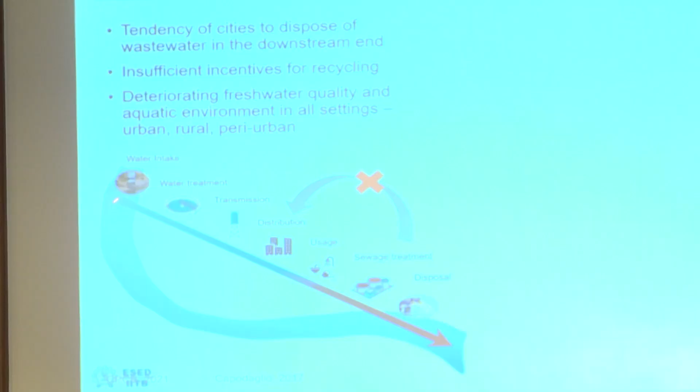So what is the status of sewerage in India? If you see, we are stuck in a linear model of water use, okay? Because earlier our primary aim was to supply water for the businesses and cities. So historically we built dams and reservoirs, we lift water from lakes, we transmit it through big lines, we distribute and use it, and then the used, contaminated water, treated, untreated or partially treated, is mixed with our lakes, rivers and water bodies. And that is the linear model of development that has been followed.

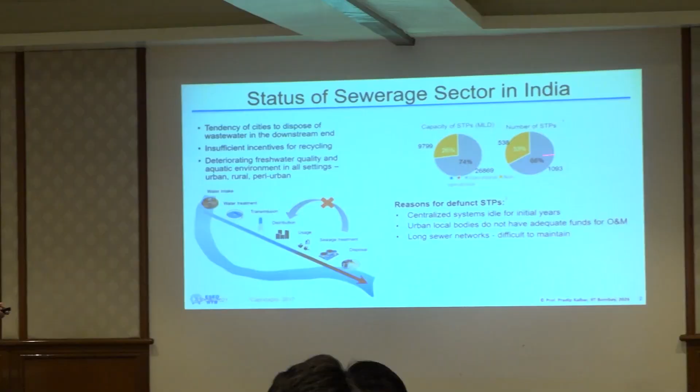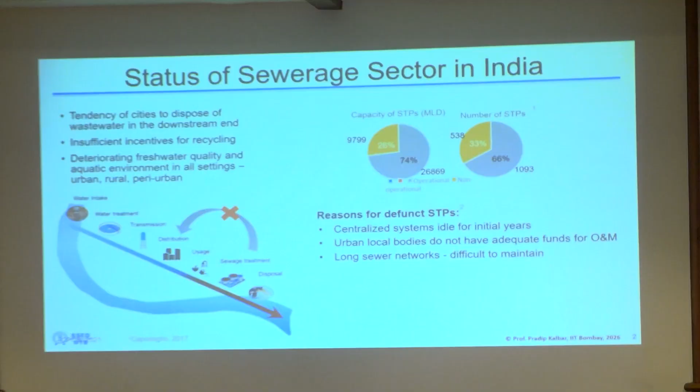Now STPs are basically proposed to fix this problem, that we'll have an STP here and it will solve it. But an STP will not work on its own unless you put energy, manpower and effort into it. And to put in that effort, you need money. So unless that money is sustained, nothing will be there. So STPs are there, but they may not be operational. Many STPs are defunct wherever you go, because the economics has not been worked out for those STPs. So we have to work out the economics.

There are highly centralized sewage treatment plants which I have seen remain idle. I will show some photographs. These are just white elephants, sitting there doing nothing. See, the infrastructure is funded by some third party, right? Central government funds and development banks fund the infrastructure, and urban local bodies are meant to maintain it by generating revenue, but there is no strong revenue stream for sewerage or sewage management, okay? The revenue is not protected, not segregated for sewage management.

So there are issues that I will further explain. The point is that merely creating infrastructure is not sufficient, okay? We may think that infrastructure may solve the problem, but it may not. The infrastructure is there, but whether it is sustained, whether it is working or not, that is very important.

So what is happening is we are always jumping on some very high-end solution, that we'll have underground drainage, then the problem will be solved. But if you see, a large part of our cities are unorganized. Informal settlements are there. There are many communities who do not have access to water supply.

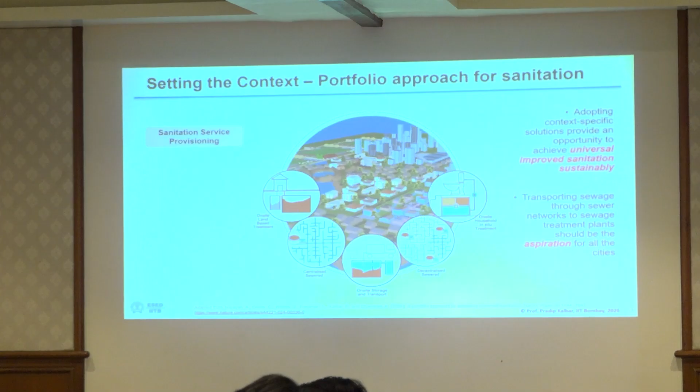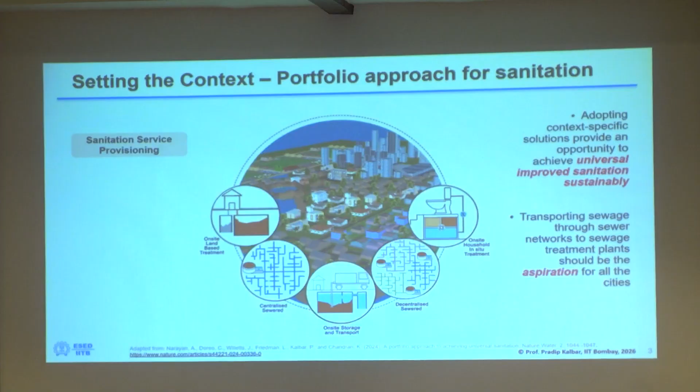So for that, we need to have something called a portfolio approach. Portfolio means we have to have a bouquet of options given to communities to solve the sanitation problem. If you just focus on only an underground drainage network, only one large-scale STP, that will not work for our future. So we have to move from this centralized sewer; other options are also there, which are not discussed, not prioritized. Like on-site treatment, decentralized sewage treatment, on-site storage and transport. So many other things are coming.

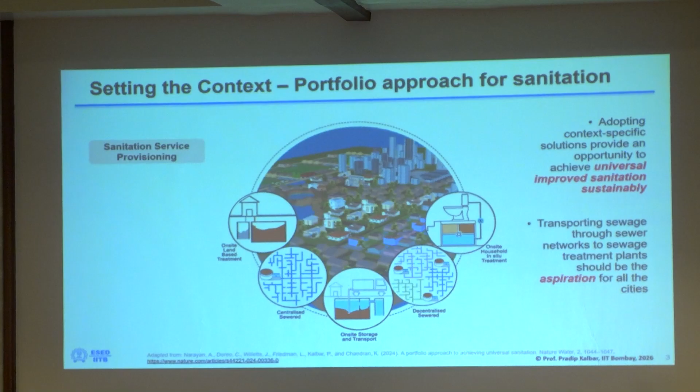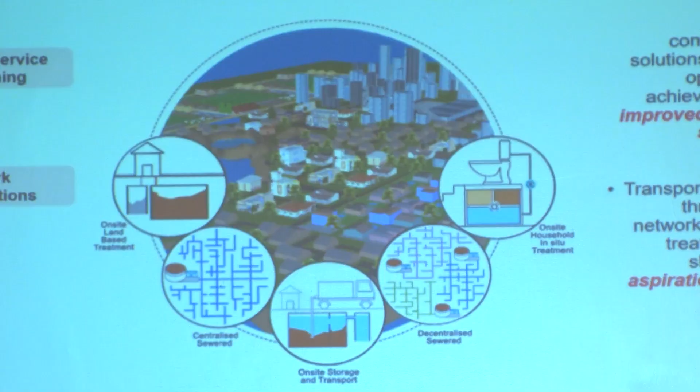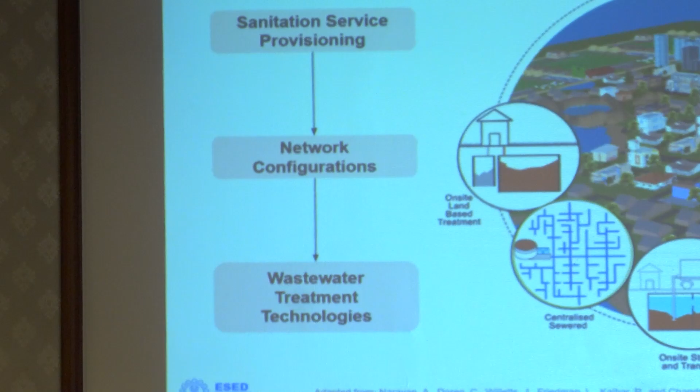So sanitation service provisioning is one part of the challenge. Network configurations: a lot of focus is given on sewage treatment, but how are we designing the sewer networks appropriately, and how to do this entire thing sustainably is a question that I'm going to deal with. So to have sanitation for all needs a very different approach rather than a conventional sewer-based and STP-based approach. There are many wastewater treatment technologies. We can connect toilet to tap; that kind of technology is available. So it's not about technology, but whether that technology is feasible for the context, whether the municipality will maintain that technology. Those issues need to be discussed.

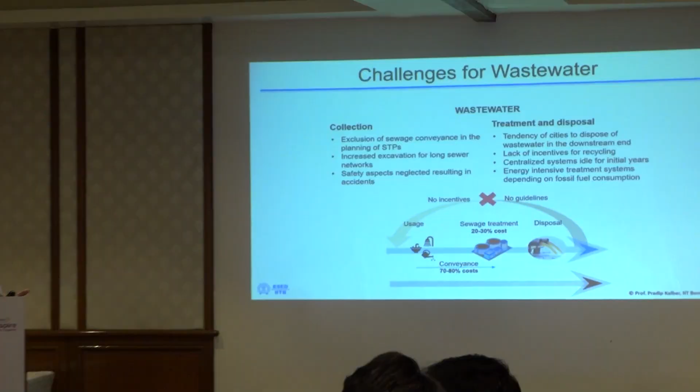So what are the overall challenges? We are more focused; all the discussions happen on sewage treatment. Although I'm working in an engineering department, my work is mostly on management and policy. So if you see the cost economics, sewage treatment costs 20 to 30%, but the network costs 70 to 80%. But all the discussions and debates happen on which treatment technology. That is not the problem, please. The problem is whether our sewer networks are laid properly.

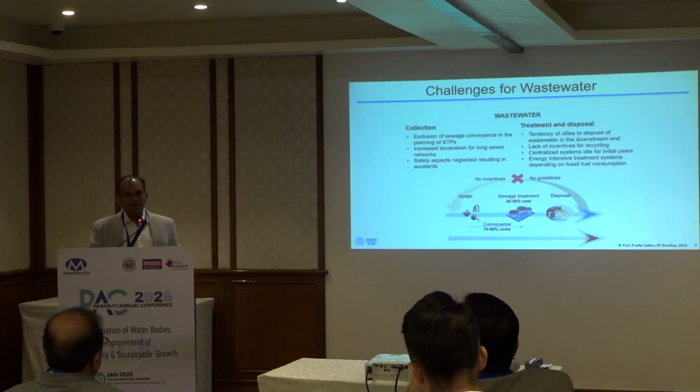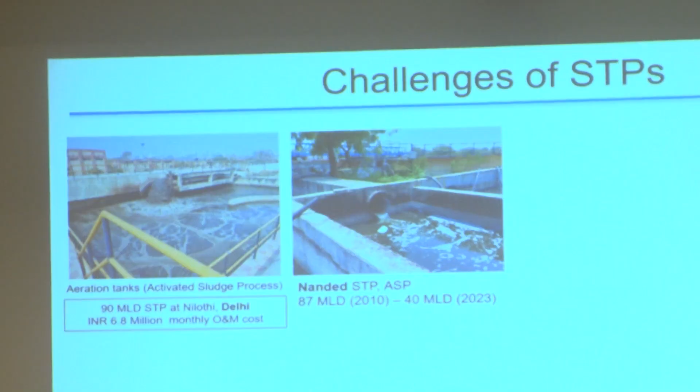I have seen many cities, I will not name them, where the sewer lines are laid opposite to the slope, against gravity. Just a rush to lay down the sewer system. The zones and the planning are not done properly. So even if there is a sewage treatment plant, it is not functional. It is not receiving the sewage first of all; functioning comes second. For example, Nanded had a sewage treatment plant in 2010 with a capacity of 87 MLD. Even after these many years, half of the sewage is not received. So infrastructure creation is happening, but utilization is not happening.

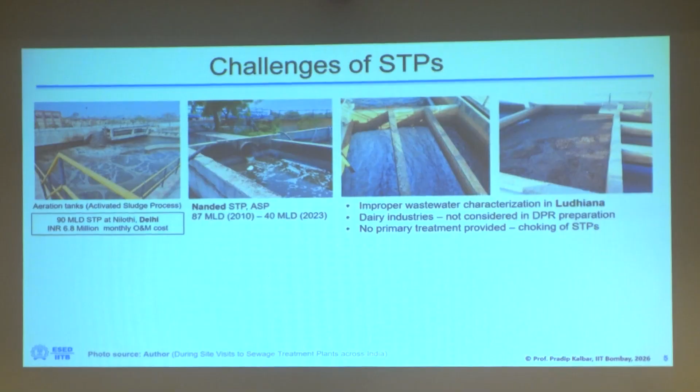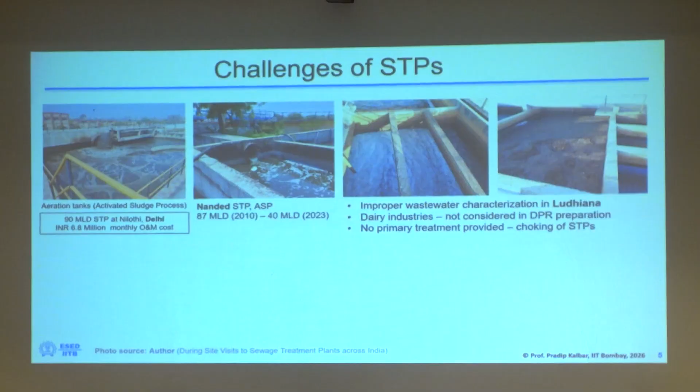We have sewage treatment plants where the DPRs are done so fast that cow dung from whatever tabelas are there in the cities is reaching our sewage treatment plants. As an environmental engineer, the first thing we are taught is to do site characterization. How many people are doing site characterization today? People are just rushing and preparing a DPR, and that's not to blame any consultant. It is an ecosystem that puts pressure on the consultant: next week you bring a DPR. That's not the way we should ask consultants to prepare a DPR. No site characterization, no feasibility, no primary treatment, directly secondary treatment. This is failing the first principles of environmental engineering. We have moved away from our own knowledge base.

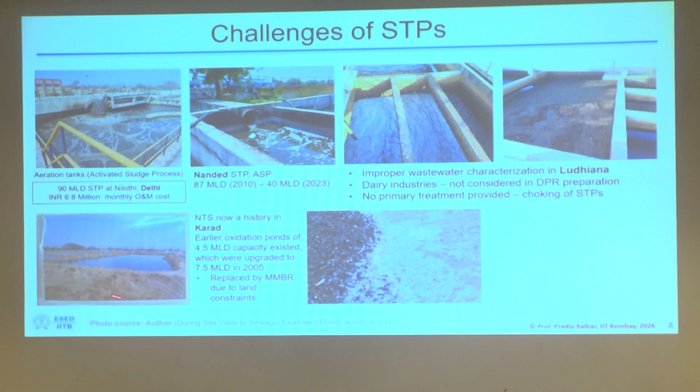India is a traditional country with cultural heritage. For sewage treatment, we had nature-based solutions. This is from Karad, from Kolhapur. We had nature-based solutions, which have now been converted to mechanized systems. Nature-based systems were a part of our culture. There are very nice handbooks written by great people from different colleges on how to maintain and do nature-based treatment. Those lands are now taken over, and only part of the land is given, assuming that a mechanized treatment system will work. It will work if somebody pays attention to it.

Then what happened in Bangalore and part of Mumbai is that because these things are not working, people thought, let us do something at building level. And now the building-level STP is another trouble. My view on building-level STPs is that we should not put a burden on a housing society to run a very small capacity STP, because that is not their job. Having an STP is like adopting a baby. You have to feed chemicals, check the pH and every parameter, which housing societies can hardly maintain, and there are not good vendors available. So the Bangalore crisis happened because municipal STPs were not working.

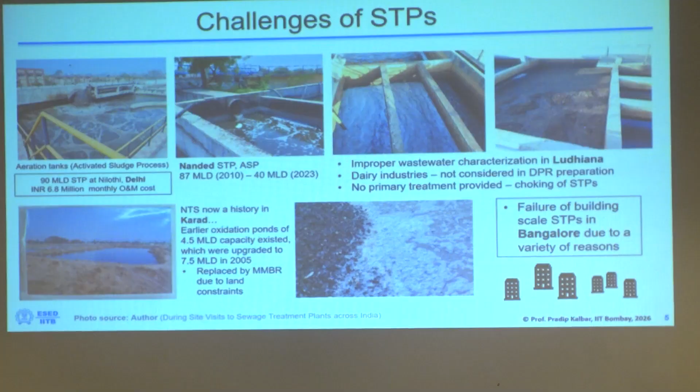And at building level, they had 4,000 STPs at building level. 80% are not working. So they thought the municipality will do treatment, and the building thought the municipality will do treatment, and nobody was doing treatment. And then the groundwater was only extracted, so we had a crisis like Bangalore. So we do a lot of such studies.

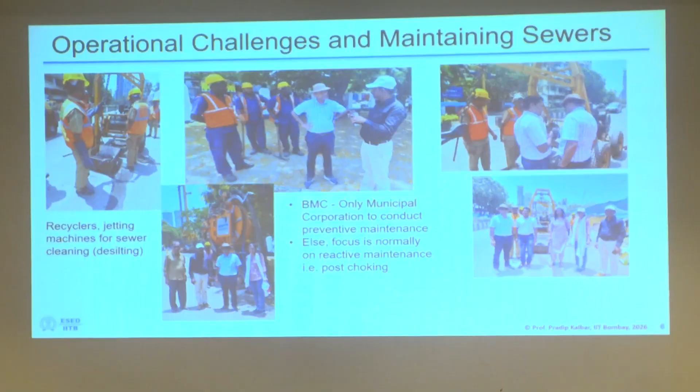This is BMC's. So BMC is the only corporation to do preventive maintenance, and that is because of Dr. Salvi. We studied their preventive maintenance part. How many municipalities have that capacity to maintain underground drainage systems? Very rare. And then BMC has to go as a big brother or a sister and help other municipalities to train them, and they have a municipal capacity building research center.

So concerns are there for small ULBs. There are many concerns emerging from small local bodies. BMC can manage because they have capable people like Dr. Salvi, and many such people who are helping the municipality to maintain the infrastructure. This is the reality of a small city.

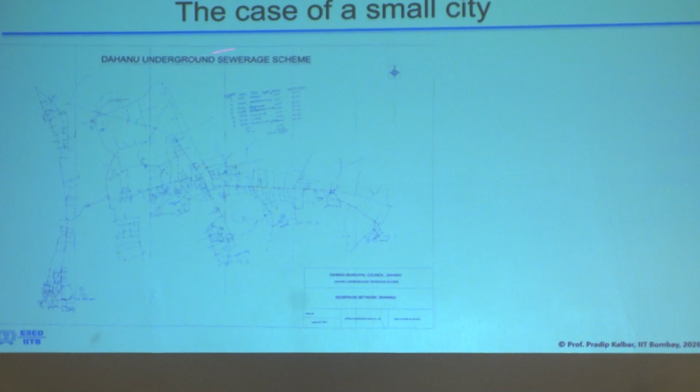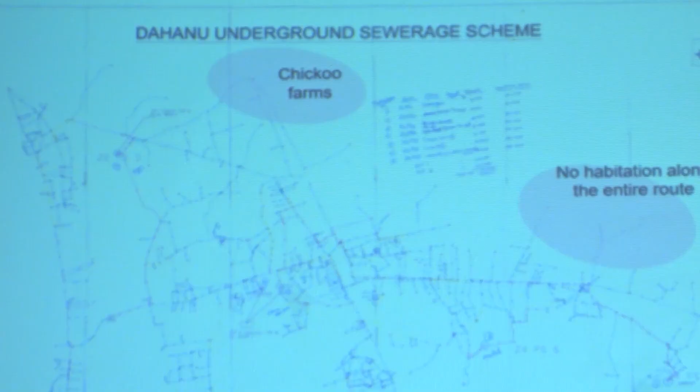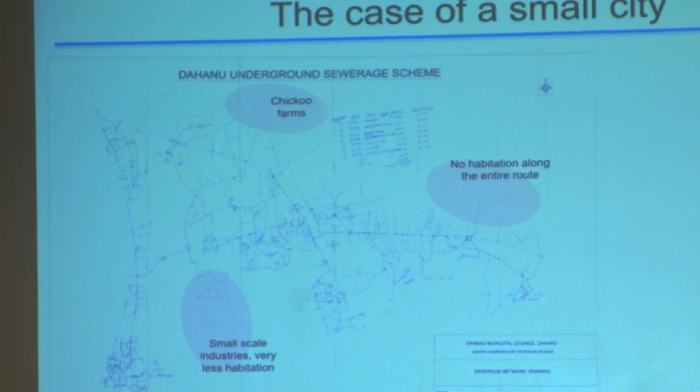This is from Dahanu, where we have worked with big cities like Mumbai and small cities like Dahanu also. Now see the DPR prepared here. When the chief officer called me, he said the DPR cost seems very high. What is happening here? See, this is a chickoo farm. This is no habitation. This is small scale industries. So there will not be a possibility of flow for the next 10 to 20 years, but sewer lines are proposed to be laid here, and that is why the DPR cost increased.

And there are 7 to 8 pumping stations in this DPR, so that all sewage will be pumped to one location and one STP will be planned. That was the DPR proposed. Now what will happen with this? How will such a small municipality maintain such complicated sewage treatment? So we have to change our practice.

Excessive pumping proposed, unnecessary sewer lines proposed in areas with very less population, low velocities. I checked, 60 to 70% of the sewers had less than 0.6 meter per second velocity. That is technically not correct, but the sewer lines were proposed here, and such DPRs are getting sanctioned and approved. So these are the things we have to see, where things are going wrong.

So there are several insights and motivations for our research. Lack of focus on operation and maintenance; only infrastructure creation is the focus. Lack of adequate consideration of study area specificities. What works in Dahanu will not work in another city. Dahanu has a very nice topography for nature-based solutions. It is a pond-based town with very nice ponds. So those ponds can be taken into the system, and nature-based solutions can be used there.

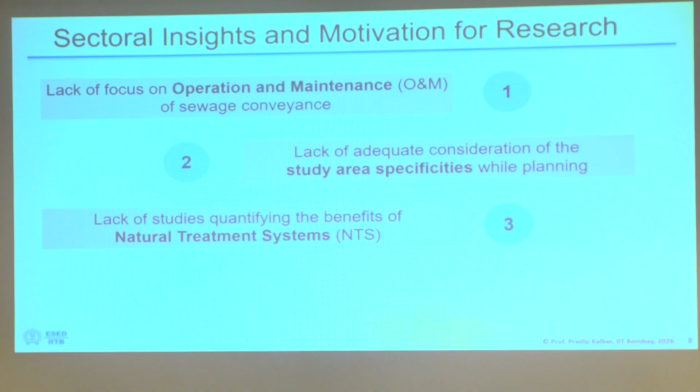Lack of studies quantifying the natural treatment systems. There are nature-based solutions at different levels, different configurations can be done, and decision support is not available. BMC has the capacity to think and plan something, but small and medium cities do not have any capacity to do things in the right manner. So they are dependent on many. They basically do not have any guidance.

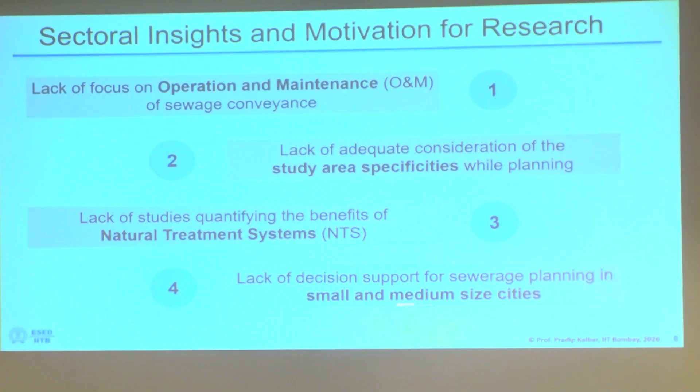And one solution doesn't fit all, and that is very, very true for our country, because we have metro cities, million plus cities, tier 1 cities, small cities, coastal cities, arid regions. So if somebody is saying this is the solution, it is not possible. The solution has to be tailor-made.

The solution has to be contextual as per the local condition. You can have the first principles and design what is required on the ground. And that's why diversity is our strength also, right? Because we are so diverse, the knowledge base created in India is huge. So what is wrong in the current approach?

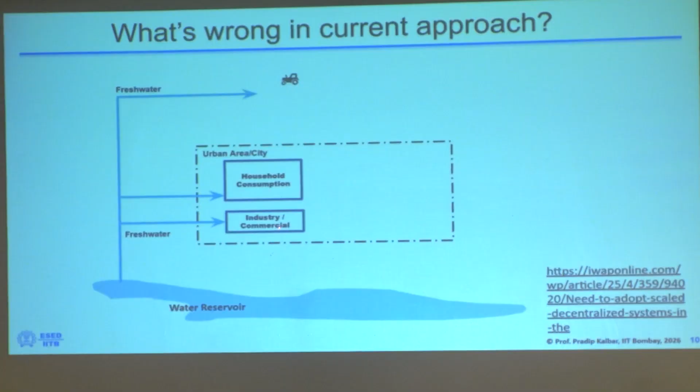This is one classical paper that we wrote. Let's say this is our system boundary where cities are mapped into this box. We have water reservoirs, maybe dams, lakes, groundwater. Historically, we are bringing fresh water for housing, industries and agriculture. Something is not visible here, but there is an agriculture land patch; somehow it is missing, and it is really missing on the ground. But the agriculture patch receives nitrogen and phosphorus from industries.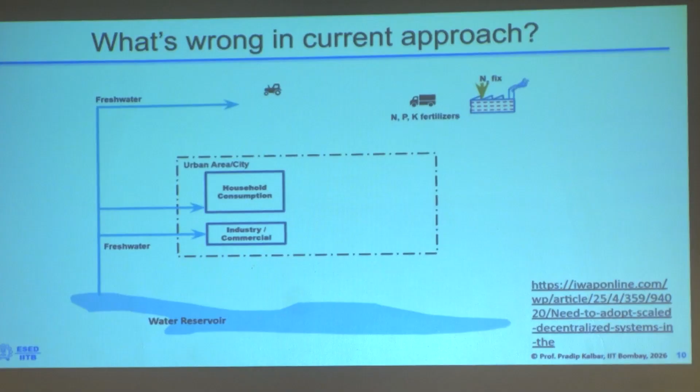Now why am I showing this? When you study things from a system perspective, from a life cycle perspective, many things emerge. So you have to expand the scope of analysis. What happens in cities affects other regions. For example, to fix nitrogen, a huge amount of energy is needed and hence carbon emissions occur. That nitrogen and phosphorus is applied to this agriculture land.

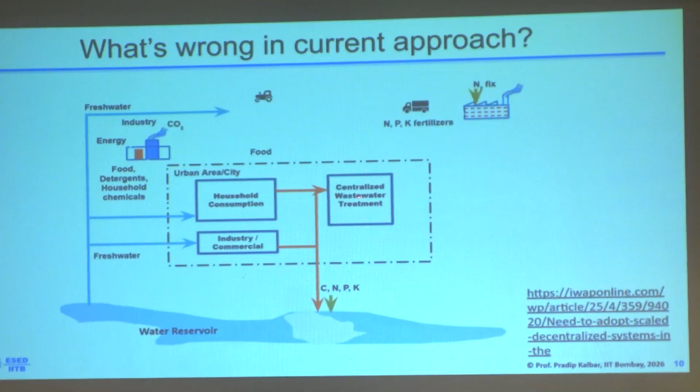That agricultural land provides food for our houses, and detergents and chemicals, all that comes to our houses, and we assume that the sewers will take care and centralized treatment will happen, but actually it is failing many times, and this entire contaminants are going into our local water bodies.

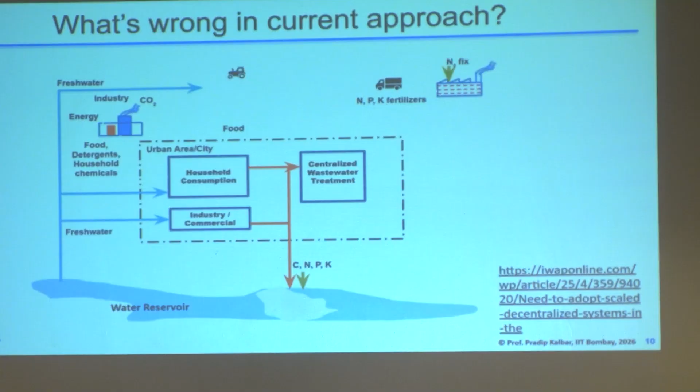See the smartness we have evolved into: we are putting energy to fix the nitrogen to generate fertilizers, and then again putting energy to take out the nitrogen, because environmental engineers are looking here, chemical engineers are looking here. These two engineers do not talk to each other, because nobody has looked at the system level. So at the system level, we are fixing nitrogen and we are taking out the nitrogen, and both are energy intensive processes. So something drastically different has to be done.

How we can generate sludge and compost that can be put back into our original system, so that this cycle can be broken. How we can reduce freshwater consumption and reduce pollution, and create new local water systems for recycling for different purposes. So we have to have local loops of water, rather than putting everything back to the original sources, so that freshwater can be preserved, and energy generation can also happen from sewage treatment. Those all concepts are there, we are just not applying it in an appropriate manner.

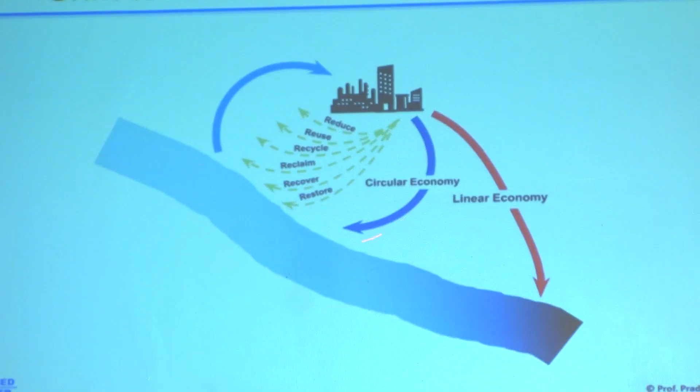There is decentralization that can also be done. So what we need to do is transform this linear way of doing things into circular, by applying reduce, reuse, recycle, reclaim, recover, restore, and many other R's. By innovating, we can apply these to fix this problem.

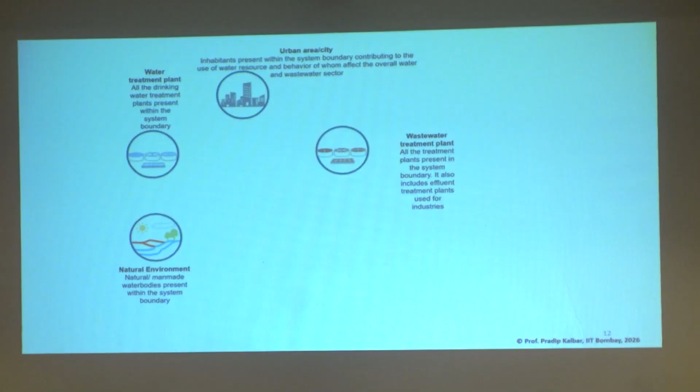So what are these R's? Our water transforms between natural environment, water treatment plant, urban areas, wastewater treatment plant, industries, and agriculture. So water gets exchanged between these entities, and they have their own physical boundaries. So we have to apply reduce at every level, reuse at every level, recycle, reclaim, restore, and recover.

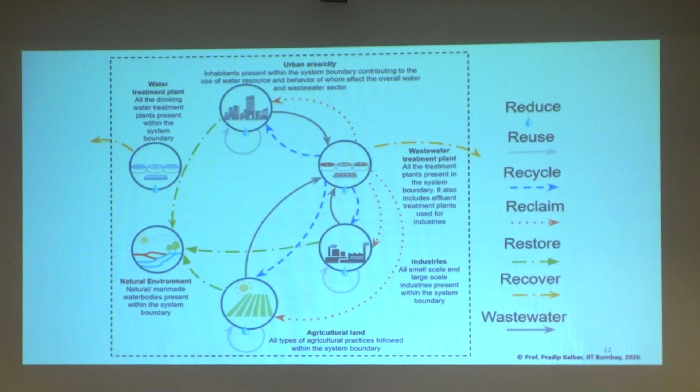When we started doing our research, we found that there is no clear meaning to these terms. People are using them synonymously, which is a problem. So we define these terms technically: what is reduce, what is reuse, recycle, reclaim.

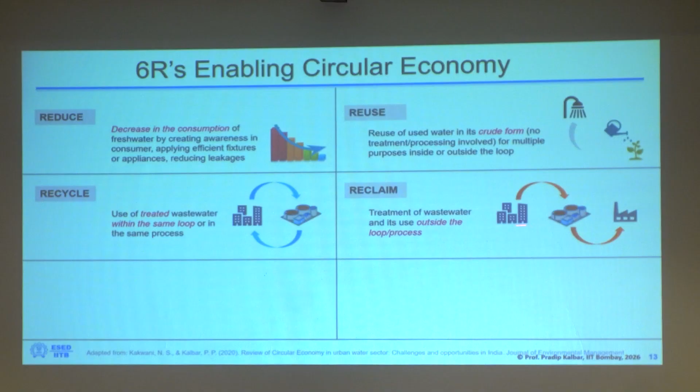For example, recycle is use of treated wastewater within the same purpose or same loop. If buildings are recycling, if nearby buildings are recycling, it is recycling. If municipality is selling water to industries, or industries taking water from municipality, it is called reclaim. Recover is recovering resources from the system, and restore is excess treated water.

Many cities, many townships have excess treated water. For example, 2-3 days back I was in Palava city. They have excess treated water, 10 MLD. Now they are selling it to industries. That is reclamation and restoration efforts, those are there.

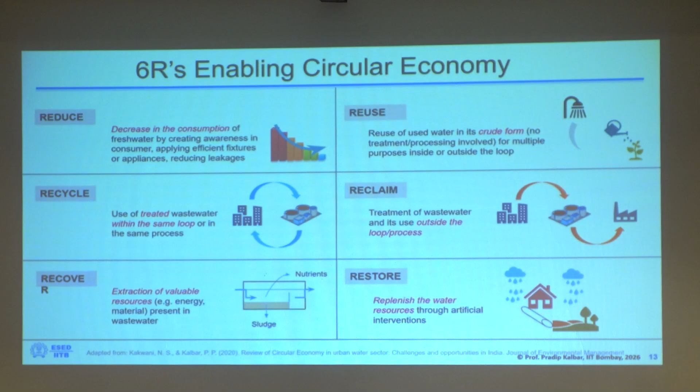Now all that research has been taken up by the Central Pollution Control Board, and if you see their guidelines, they have taken the definitions that we have given from our research. That is, let's say, our contribution to policy making.

So the next part is, you will say, okay, in my city what should I do, which strategy should I start working on, because as I said, the solution for Mumbai and the solution for Nagpur or Hyderabad will vary a lot. So you have to have a priority framework for a given city. Where to start? Reduce is definitely something you have to do everywhere, it is universal.

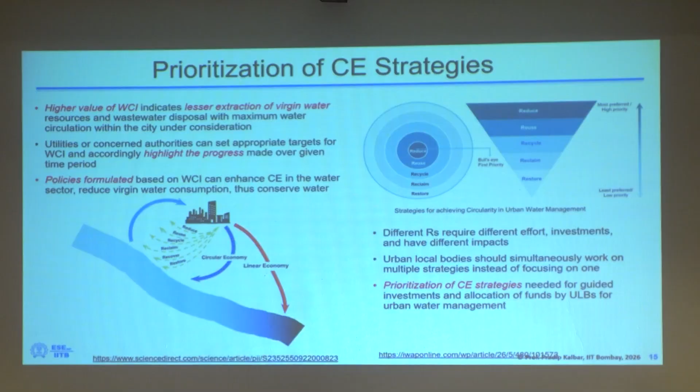Then whether to reuse, recycle, or reclaim, that is another research question we concluded. Those who are interested can read the papers. I am not going to present a lot of technical details, I am just presenting the broad ideas, just saying that simply saying I will work on circular economy will not work. Prioritization at the local level has to happen.

So, as said in the inaugural speeches, unless you work with many other stakeholders for system thinking, for value optimization, for innovation, collaboration, stewardship, and transparency - transparency is very important, what municipalities are doing, what every stakeholder is doing - all these principles of business have to apply to this circular economy. This combination has to happen, and only then will things move in the right direction.

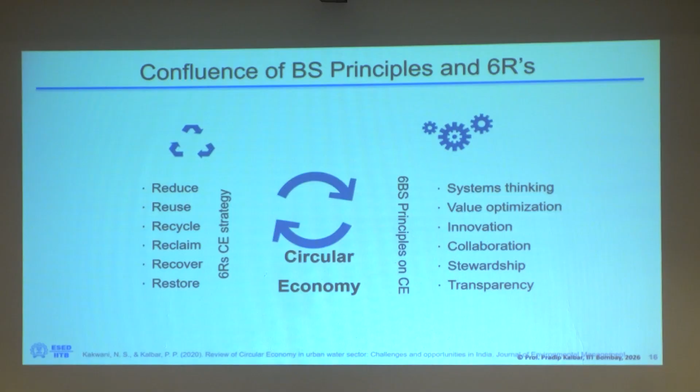So the challenge for water circularity is whether the effluent produced is of recyclable quality or not. In today's time, we are facing huge challenges. We have some trace persistent contaminants which are very difficult to remove. Our rainwater is found to have plastic, microplastics. Our rainwater has also not remained pristine. That is because we have emerging contaminants, household chemicals.

The amount of pharmaceuticals and chemicals used in houses, all of that goes into sewage treatment plants, which are not equipped to handle these very toxic compounds.

So even if you produce recycled water, the question is whether there is a market for it, because somebody has to be ready to receive that water. I have seen housing societies deny using recycled water even for flushing, and that mindset has to change. Rotary Club and other organizations have a role to play in convincing societies to show some consideration for the environment, using recycled water for flushing and landscaping.

In this direction, to improve water circularity, we have developed something called measuring water circularity. We can measure water circularity at the building level, city level, or regional level, and then prioritize circular economy pathways, which I will share. This measuring framework is another successful study we completed, including Nikita's completed work.

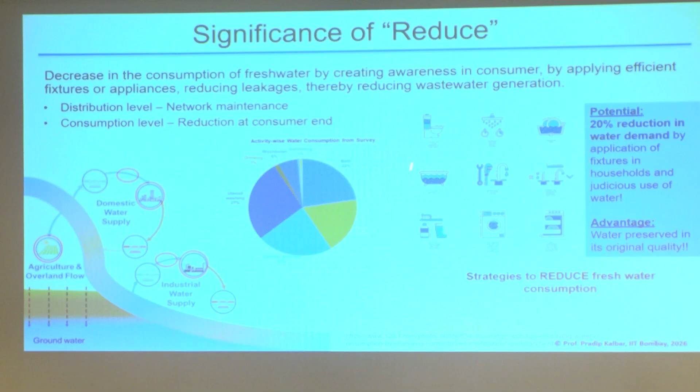Now, what are the pathways of achieving this circular economy? I'll share a few examples. Reduce is one of the neglected strategies, because the first effort should be whether we can avoid consumption altogether. So, reduce and refuse, applying efficient water fixtures and changing community behavior. Many people do not know how to use washing machines properly. We have done surveys on this. Washing machines consume a lot of water and chemicals, and if not used properly—fully loaded with the right amount of water and chemicals—a lot of water wastage happens.

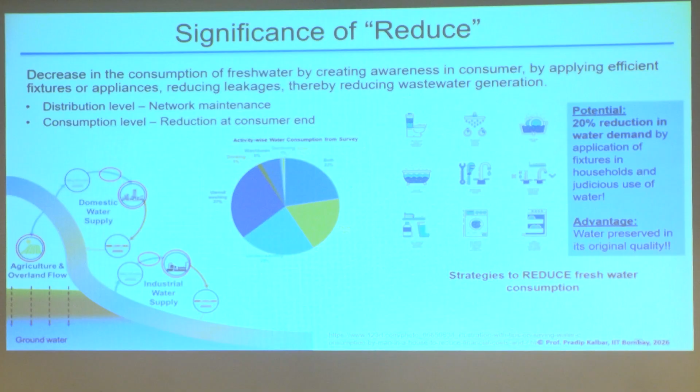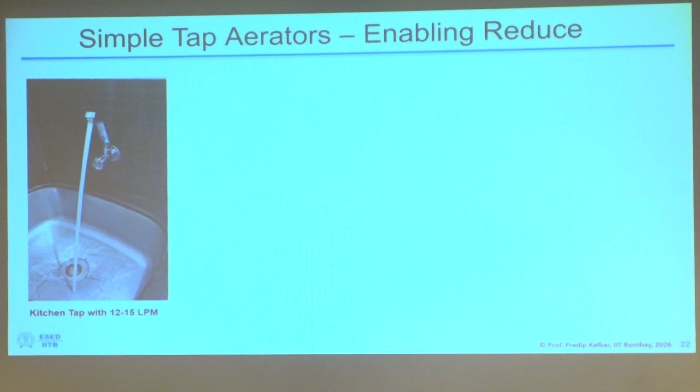So in this direction, I did some experiments at my home. This is a funny story I keep telling in my classes. My IIT gives water and BMC charges much cheaper rates, so we don't care and have huge water consumption. I measured the water coming from my tap, which was 12 to 15 liters per minute—that's a standard water tap. I was feeling bad that I preach so much about water but wasn't doing anything at my own home. That shouldn't happen, right? Some of you might question what I'm doing at IIT versus at home—fair enough. So I thought, let's do something drastic.

I bought some aerators and fixed them, thinking I had solved the problem. The next day, the maid said, 'I'm leaving, I don't work in this house,' because she couldn't work with this reduced water flow—they are habituated to the higher flow and need to quickly wash utensils and move to the next house. Even if you try this yourself, you'll get frustrated because the water isn't enough; we are habituated to that flow. Then my wife said, 'You do the utensils, or you remove this aerator—your choice.' That's circular economy—it comes down to your personal level.

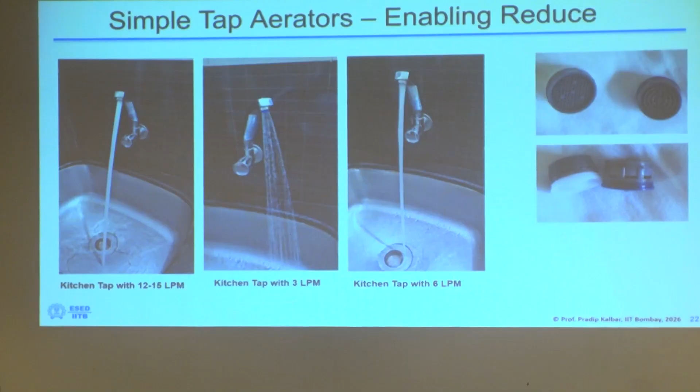I thought, what should I do? I had to become smarter. When nobody was home, I first put back the original tap for a couple of days. Then, when nobody was around, I installed a 6 liter per minute tap aerator instead. See the difference—now they still don't know I did this. The maid isn't complaining either, because she thinks the same amount of water is given—it's just a perception, playing a trick with the mind. So I saved 50% of water without telling anyone, and now there's no quarrel, everything is fine. That's circular economy—sometimes you have to do things in a tricky manner without telling people, just tweaking things slightly.

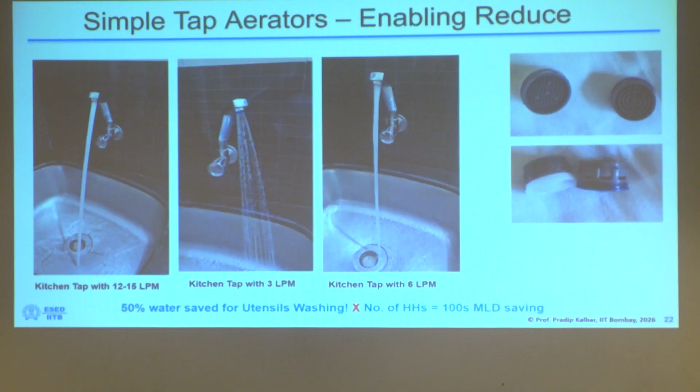If the entire Mumbai starts doing this, hundreds of MLD of water would be saved. We wouldn't need a new dam or a desalination plant. A lot of changes would happen and a lot of public money would be saved, putting us on a sustainable path. We have to stop creating the problem instead of solving it.

We have done a lot of sub-studies, and then developed a rating system—like an energy rating system, but for houses. With foundations like Prakruti Foundation, we can implement house and community rating systems.

BMC's average per capita consumption is around 200 liters per capita per day.

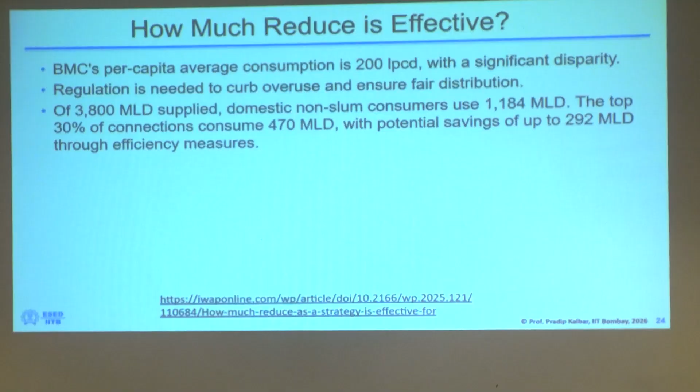If you work with the top 30% consumers, 292 MLD of water can be saved. So a lot of potential is there in reduction, which is not talked about, not worked on, not promoted. Municipal commissioners and municipal teams do not largely work on those aspects.

So that is the reduction part. Let's say after doing that, you still have used water. What to do with that? There are various approaches of doing used water management. One is what I explained, and then you have household or building level, decentralized and centralized systems, and there are many technologies.

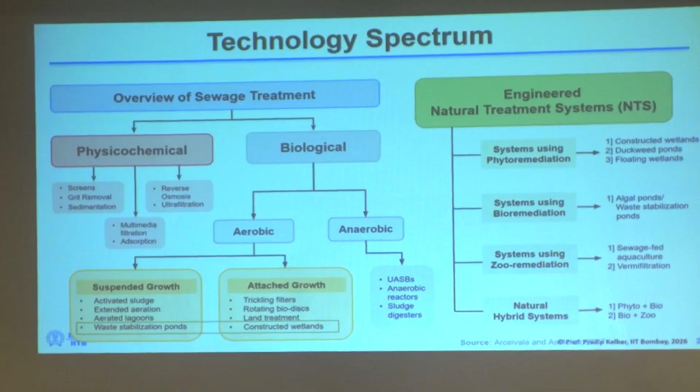I will not open this box. There are many technology providers in the market. They are ready - you give them the volume you want to treat, they will come. Largely mechanized, and now a lot of technology providers in nature-based solutions are coming up. That's good news.

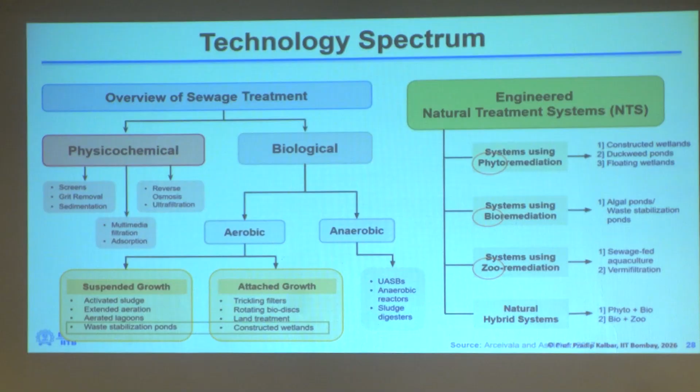As I said, large centralized sewage treatment plants don't work. I have seen sewer depths going 16 to 18 meters, very difficult to maintain. I have seen STPs become defunct like this for a variety of reasons. I have seen both mechanized and nature-based solutions, and there is confusion among people about which technology to adopt.

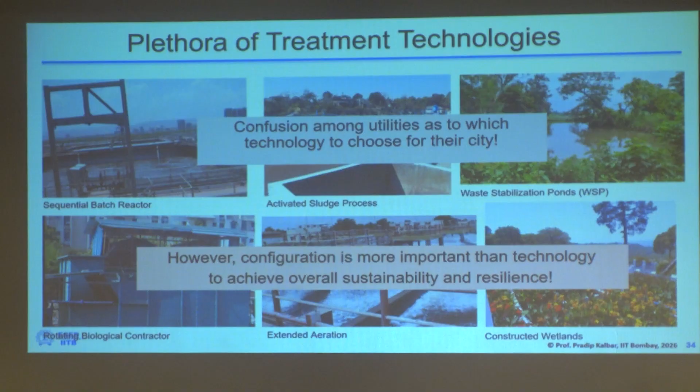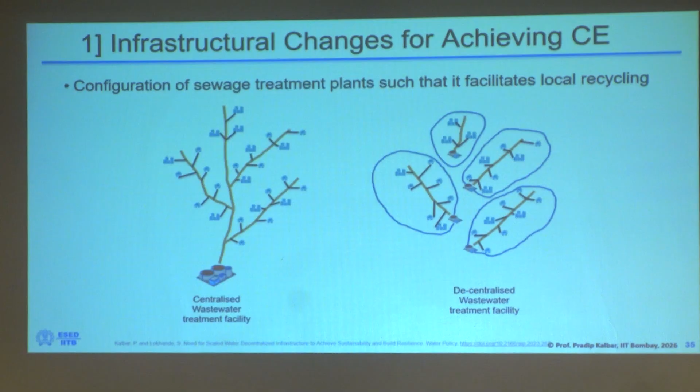So there is a discussion about whether to do centralized, where everything is taken out, or decentralized or building level treatment. Different scales of treatment can happen. Now the question is what scale we should do the treatment, and that's the research I gave to one of the students, which is now completed.

How we frame this problem is: highly centralized STPs are not working, and highly decentralized, meaning building level STPs, are also not working. Our parameters of assessment are sustainability and resilience. What are those? How can we quantify sustainability? We can talk about sustainability, but we have to measure it.

So for measuring sustainability, we have to use life cycle cost, which comes lower at some middle level. We have to apply and quantify social benefits, quantify potential for recycling water, quantify resource recovery, and quantify ease of governance. Whatever solution we give, the municipality should be able to govern it - it should not require another third party to entirely maintain that infrastructure - and we need lower environmental impacts.

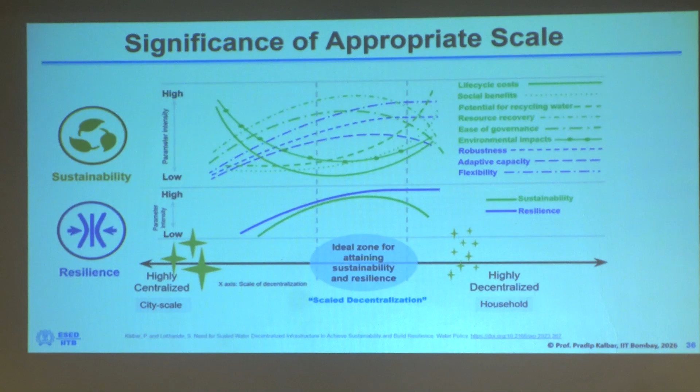So overall, sustainability will be better at something done at the mid level. The new expectation is climate resilience, which I will not go into deeply, but that also works out better for smaller systems, not mega systems. So the ideal zone for achieving sustainability and resilience is somewhere in between.

So we wrote this article, which is the most downloaded article now in the Water Policy Journal, about the need to adopt scaled decentralized systems.

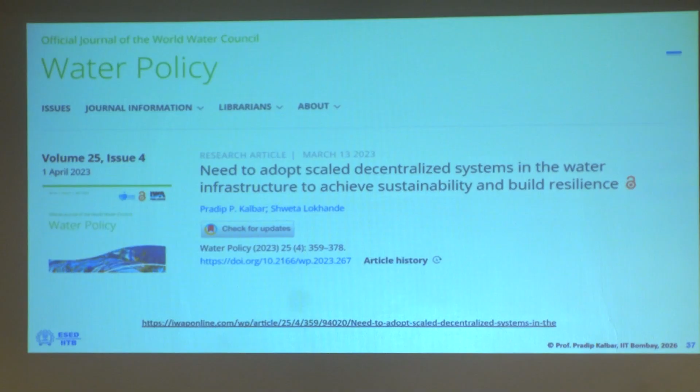Why am I saying this? When I see cities like Dahanu, where the consultant prepares a DPR that only one STP of 10 MLD will come, what I am saying is you split it up - have 1 to 2 MLD or 3 to 4 MLD, at least 2-3 STPs, so that local recycling can happen.

Similar logic for cities like Kolhapur or smaller cities like Nanded, where you can split up the STPs. For Pune and Mumbai kind of metro cities, you split up the STPs and have local recycling stations instead of putting everything at a very far distance and again bringing it back. So if we really want to do recycling and reclamation, we have to split up the infrastructure, and decentralization is the path.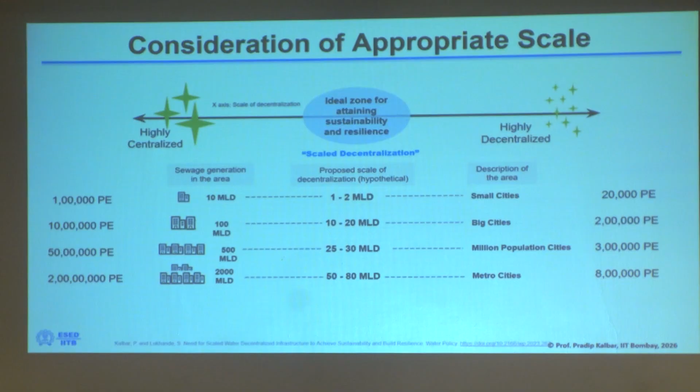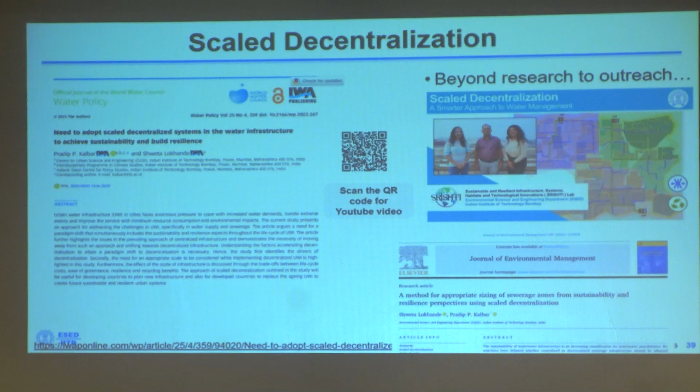So our students have created this very nice video for those who are not from this sector or those who want to understand. Very good animations they have created. They went beyond publication - they went one step extra and created this video for dissemination of this knowledge.

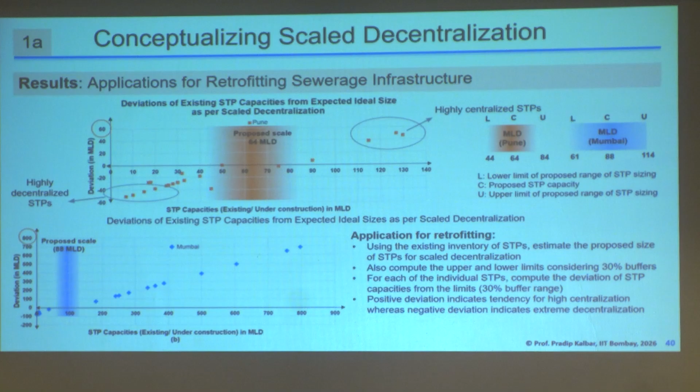So what this research means - on the x-axis you have the capacity of, let's say, STP municipal capacity. For Pune, this is the ideal scale for Pune city, 64 MLD, let's say 60 to 65 MLD. What Pune city is doing is very large or very small STPs, not at the ideal scale. Similarly for Mumbai, what we studied is Mumbai is doing mega STPs, or too small decentralized STPs. But the ideal scale is this, so that recycling happens locally.

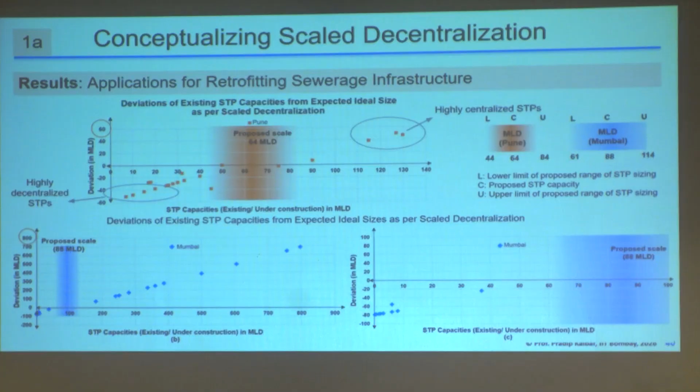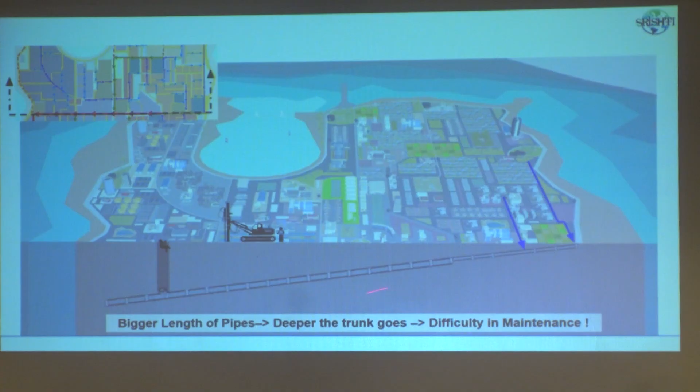Now you do not need another tunnel to take the sewage from here to another location, which is costly, not sustainable, not climate resilient. If you are building a very long sewer to take sewage, another hazard that comes is how to maintain this. There are many cases where workers die and all that.

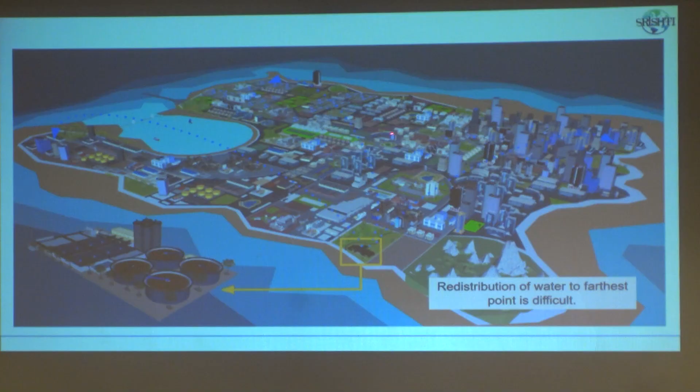So, there are safety concerns also to maintaining deeper sewers, and deeper sewers happen because you plan for centralized systems, then it creates a lot of problems. So, what I am saying is that you have to take back the water to different recycling locations if you have only one STP, and if you plan smaller zones, then you can have localized recycling. That is the point I am trying to make.

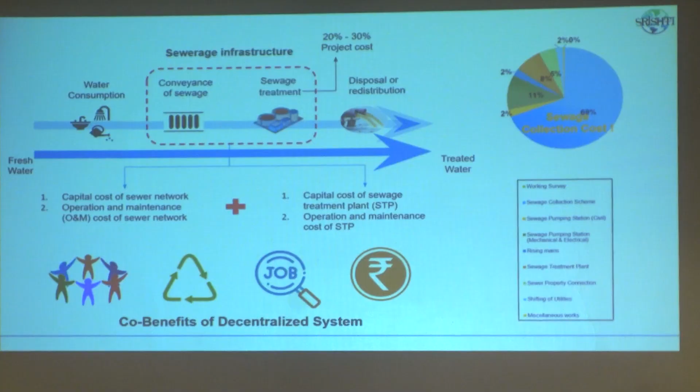And then there are many concepts like you have to account for life cycle costs. Right now the decisions are made only based on capital cost; the municipality thinks what is the current capital cost. But if you see the amount of electricity that is required to maintain the infrastructure for the next 30 years, nature based solutions work out much better because they do not need electricity.

So, there is a choice that we have to make whether to go for decentralized systems and what level of decentralization, whether to go for mechanized systems or nature based solutions. And both do not work in many contexts. Hence we come up with another concept called hybrid treatment systems, where we take the best of the best mechanized treatment system and combine it with a nature based system, because energy is more for mechanized systems, whereas land is more for nature based solutions. So, there is a trade off.

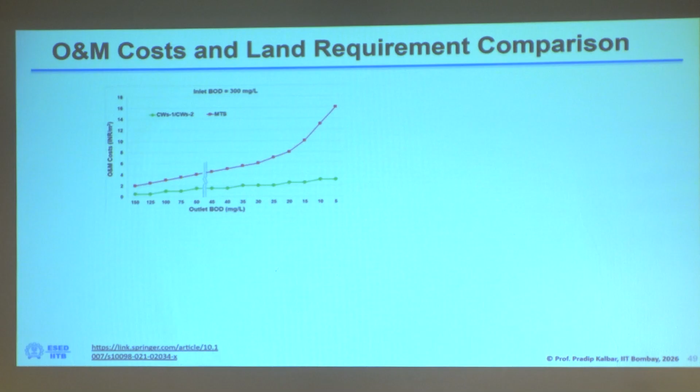If you see, this is the outlet BOD level, and this is the operation maintenance cost. For high end mechanized treatment, you require 15 to 20 rupees per meter cube or even 30 rupees per meter cube, whereas nature based solutions are cheaper for operation. But the land cost, meter square per MLD, is very high for these green systems. That is why those are not promoted. But what I am trying to say is, down to 30 BOD you do the best part using a mechanized treatment system, and for polishing treatment you shift to nature based solutions. So, you integrate both of them and then you achieve sustainability.

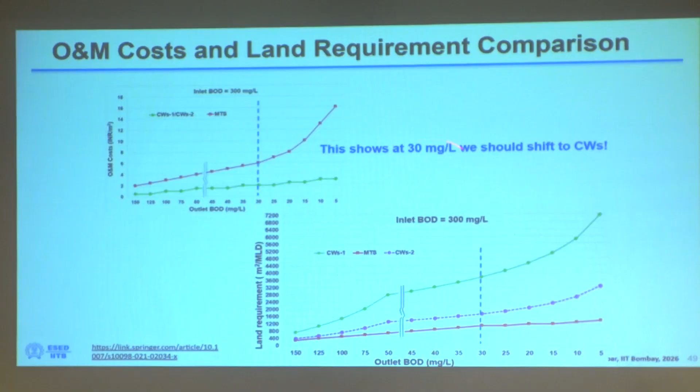We did a market analysis. If you buy land from the market at 2 crore rupees per acre, leave Mumbai aside, but in many other cities it will work. Even at 2 crore rupees per acre, in every context nature based solutions, constructed wetlands or hybrid treatment systems are better than any other mechanized system if you do the life cycle cost for 30 years. So, the municipality has to see whether they want to maintain the infrastructure for the next 30 years. In the economic evaluation, operation cost plays a major role, which is often forgotten in decision making.

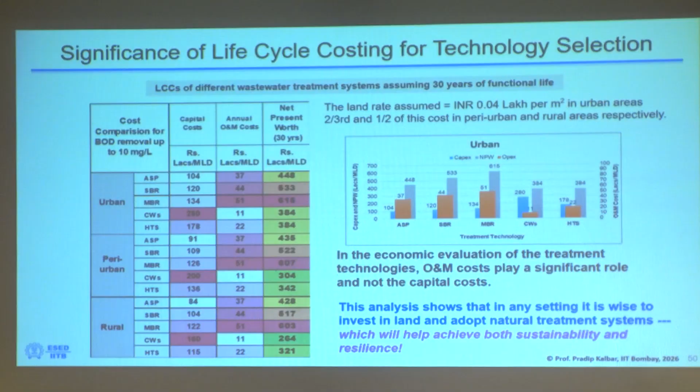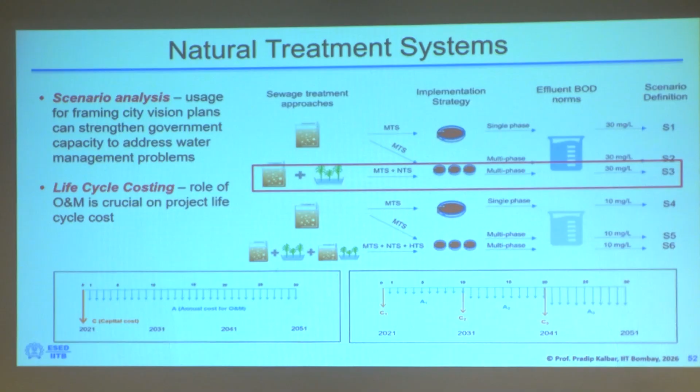So, if we have to achieve sustainability, we have to change our thinking of how we do the economic analysis, how we procure the systems, how municipalities take decisions, and that hand holding we have to do as an academic body from IIT Bombay, as a Rotary Club, as Prakruti Foundation, as many stakeholders. Many such concepts are there, but I will not give more time to this. We do a lot of such scenario analysis, so we will be happy to support many municipalities.

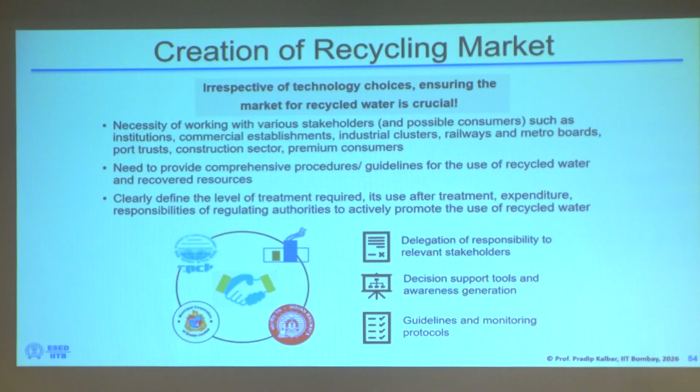There are many climate change benefits. If you go for nature based solutions, you can save money as well as carbon, and that carbon can be traded and taken into account. Many opportunities municipalities are not trained for right now can happen, and we have shown how much reduction is possible at a national level. And we have to work for the creation of a recycling market. If you have only an STP and recycled water, and you do not have agreements with MIDC and the industrial clusters, recycling will not happen.

So, I will stop here, but many such solutions are available, and I will take questions rather than just telling. I shared some personal experience, some municipal experiences, some industrial experience, and a lot of this research is available on our websites, you can refer to it, and I will be happy to collaborate on these topics.